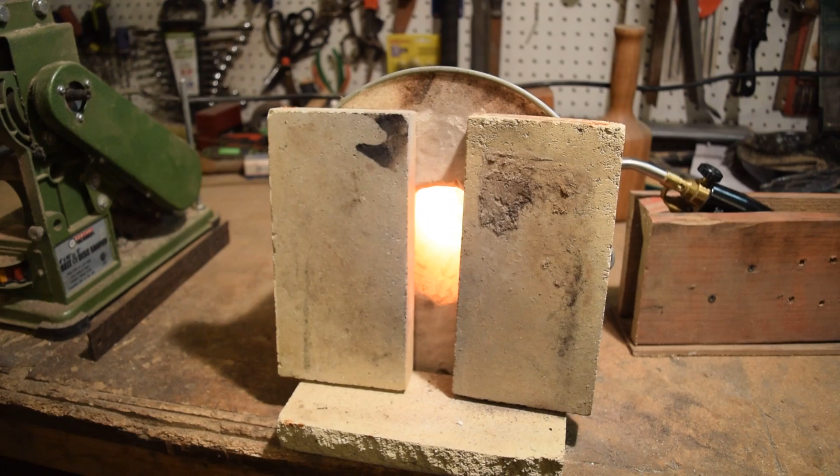My name is Dustin, and today in the shop we're going to be building a double burner forge. So I've been using my same bucket forge, which you've seen in other videos, for several years now. It's worked really well and it works great for doing heat treating for knives, anything from small knives up to medium-sized knives. But anything bigger than that, and any steel bigger than that's really hard and doesn't really work great

in the forge. So I've been really getting into blacksmithing and kind of want to make bigger things and bigger projects. I want to be able to use and move bigger pieces of steel. So I'm going to be building myself a forge, which will actually hold all that steel and be able to burn and heat up well enough to be able to do all that.

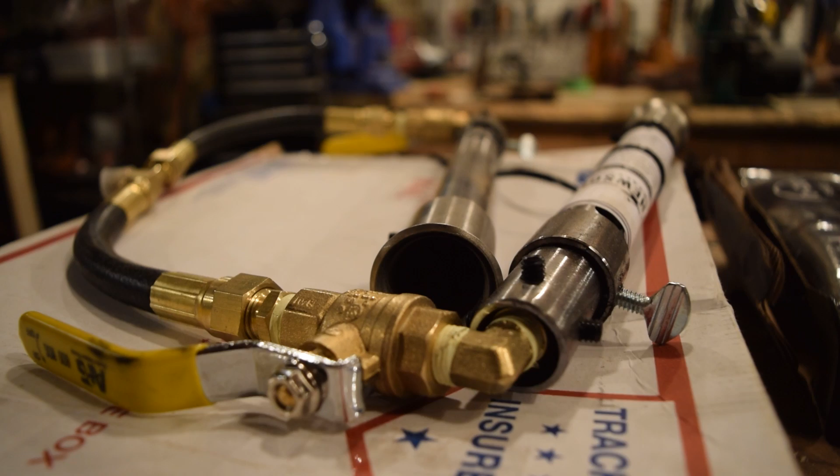And this is going to be kind of a forge that's built out of all sorts of different things. I have some steel that I had from an old lawn roller. I have bricks, refractory bricks that were given to me from a friend of mine. I did purchase the burners. It's going to be a double burner forge, so I purchased the burners from Mathewson Metals. And the rest of these things I've just picked up from a normal hardware store. So not super expensive, just something that I'm going to put together, but should work really well as a double

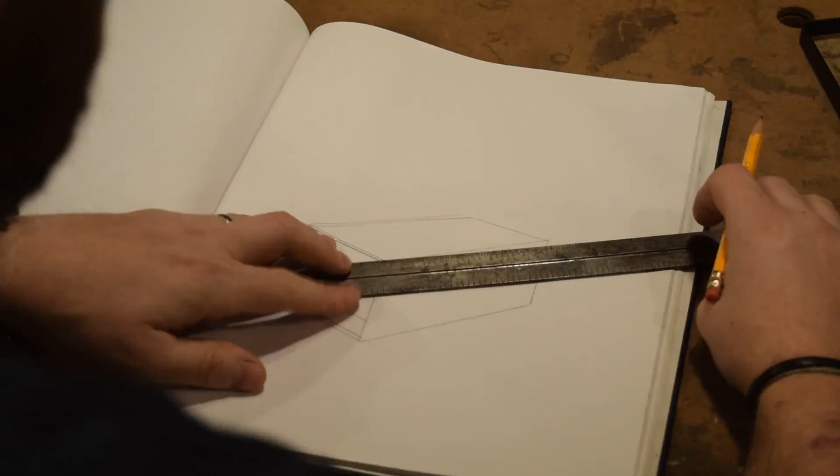burner forge. First thing we're going to do today is start on the design. So I'm going to kind of show you what I'm thinking. I'll draw it in the sketchbook so we can all see together, and then we'll start building it. My plan is to use a total of 12 bricks. So I'll have 4 bricks on the bottom, 4 bricks on the top, and then 2 bricks per side. And then the burners will come down through where the bricks intersect. I'll have gaps here for the burners to come down through to be able to burn inside.

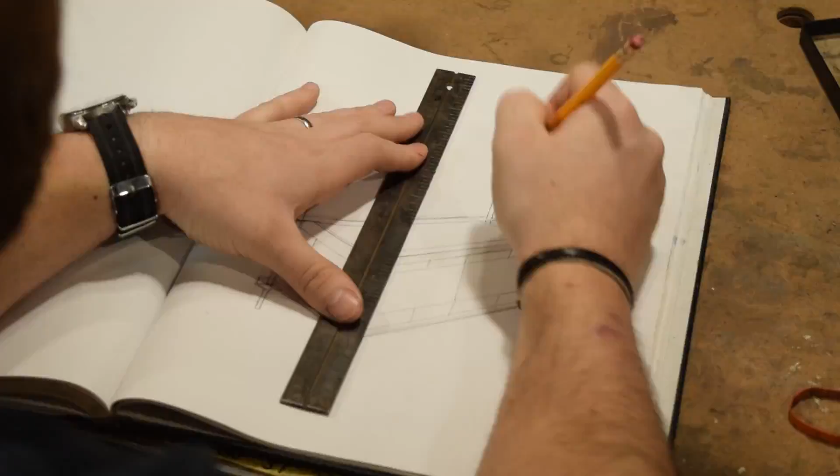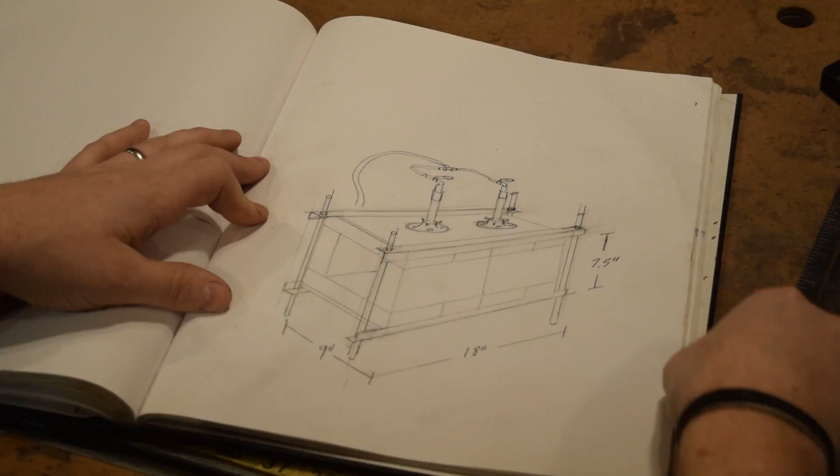And as you can see, the whole thing is held together. I'll have angle iron on all 4 corners. The top and bottom will be made out of sheets of steel, which I'll then screw these flanges into, and those will hold the burners. And then everything's going to be held together just by tension by threaded rod, which will be bolted and drilled through all of the angle iron. So in total it'll be 18 inches deep, 9 inches wide across, and then 7.5 inches tall.

What I'm going to use to do the sheet steel for the top and bottom is this, which came from an old lawn roller. I cut it apart with the intention to use it for different projects, and this will work perfectly. So this is about 1/16 of an inch thick, and it's 21 inches long, so it's going to work really well because I need to have 18 inches for the whole forge. So this is going to give me some more room on both ends to be able to drill through and be able to mount everything with a threaded rod.

So I'm going to cut 2 pieces out of this. Both will be 21 inches by 9 1/8 inches wide, which is the length of my bricks. So I'll cut out both sheets from this, and then I'll flatten them on the anvil.

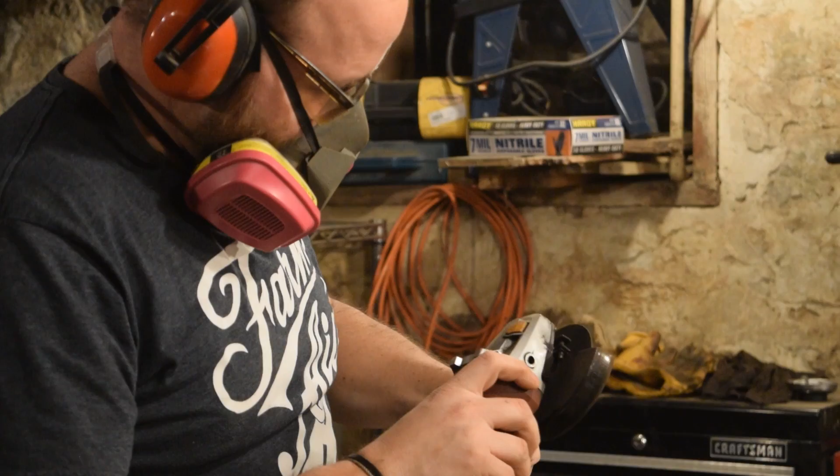Spending a little bit of time getting all this stuff set up and everything organized in the way that I'm going to have this eventually all attached together. So I have my plate steel on the bottom, the corner steel on the sides, and then 4 bricks. This will be the base of my forge. I'll have bricks on the sides and the same setup on top.

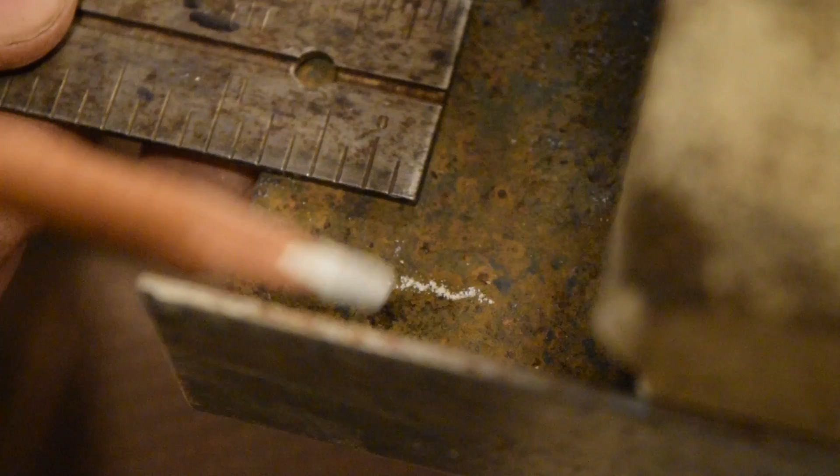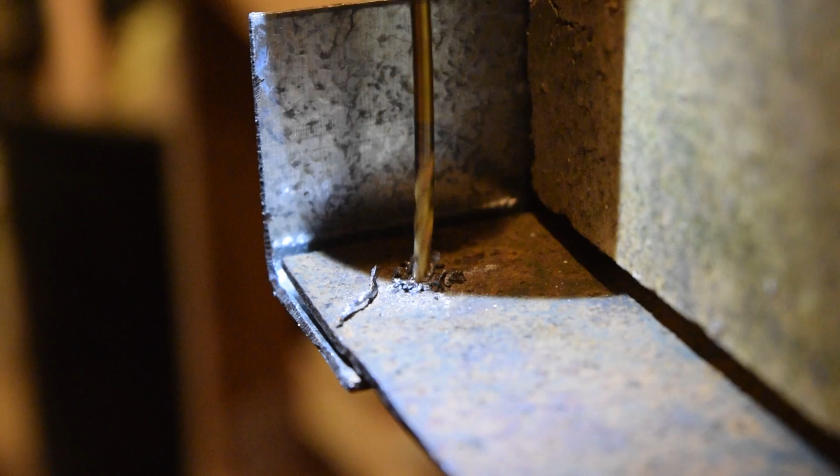But I want to make sure everything's aligned right and it's all evenly in the center, so that way I can drill pilot holes through the plate steel and through the corner pieces of steel to hold everything together. So I'm just getting it all set up, making sure it's all measured, nice and even, everything's as straight and even as possible, and then I'll drill those pilot holes.

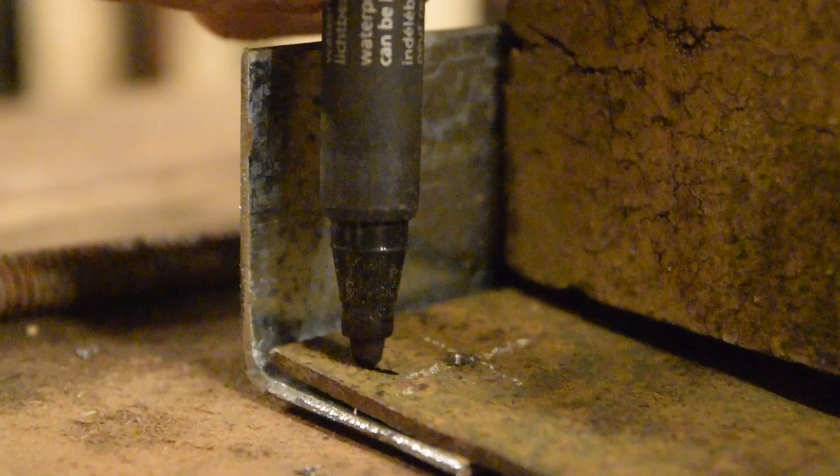And now what I want to do before I take everything apart and actually drill them all at the drill press is I want to mark all of it, everything. So I'm going to mark each brick on the bottom, 1 through 4 here, 5 through 8 on here, and then each hole in each corner I'm going to mark as well, 1 through 8, starting on the bottom to the top. That way, once I take everything apart, drill it all, put it all back together, they'll all line up exactly where I have it here and now, so I know it'll fit really well.

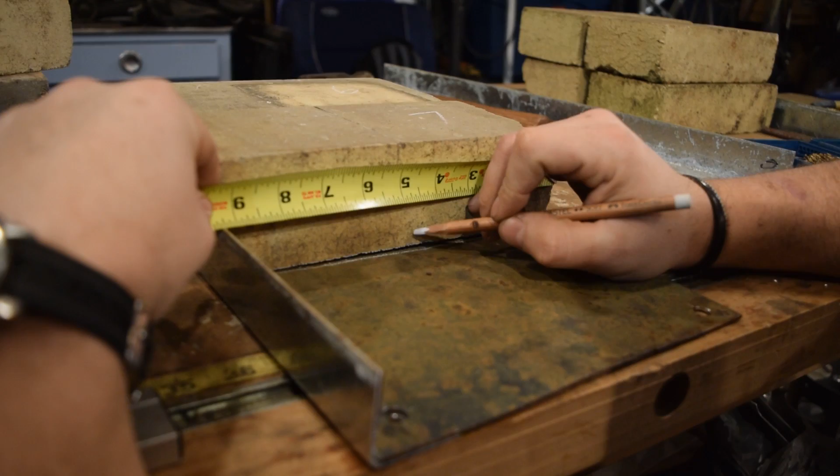So I'm going to have 2 holes coming down through the intersection of these 2 bricks where my 2 forge burners are going to come through. So I need to mark off where these bricks end so then I can cut holes in the top plate so the forge burners will come through and go through these bricks.

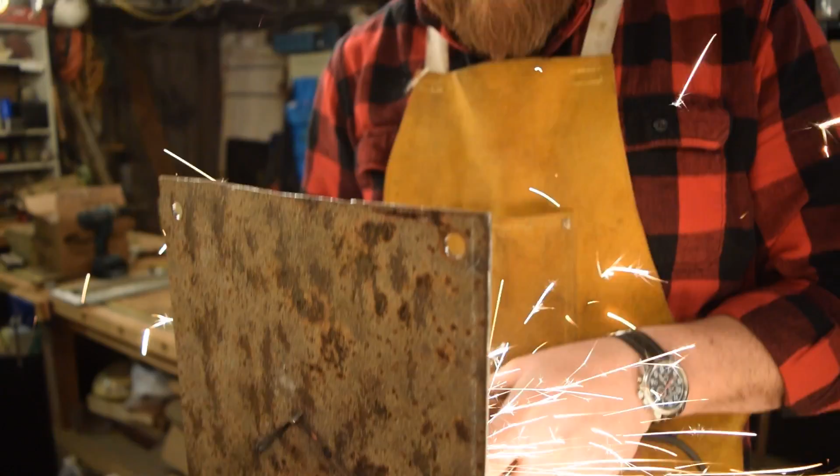There we go. Once again, because these holes are just there to accept the burners through, I'm not worried about them being cut perfectly or circles that are going to fit exactly. They're going to be covered up by the flange and the brick on the other side. So I'm just going to use the angle grinder and just cut straight lines.

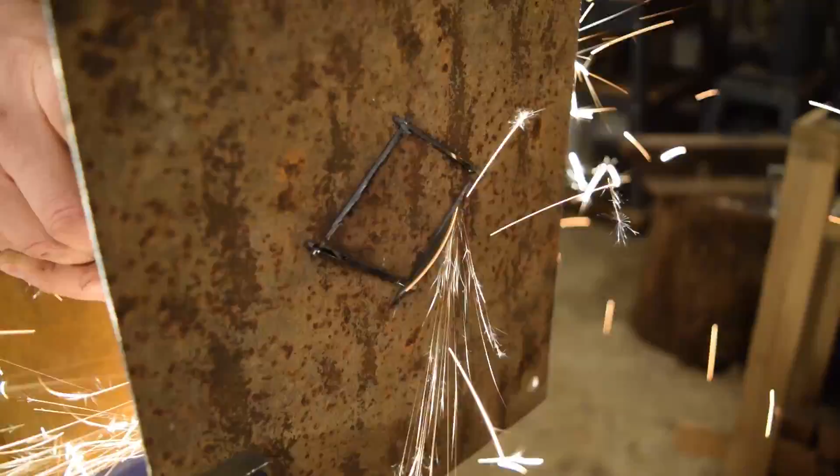So I'll make that mark and then I'll just use my square. Draw a square line coming out to reference off of. And then I'll do that to the second brick as well.

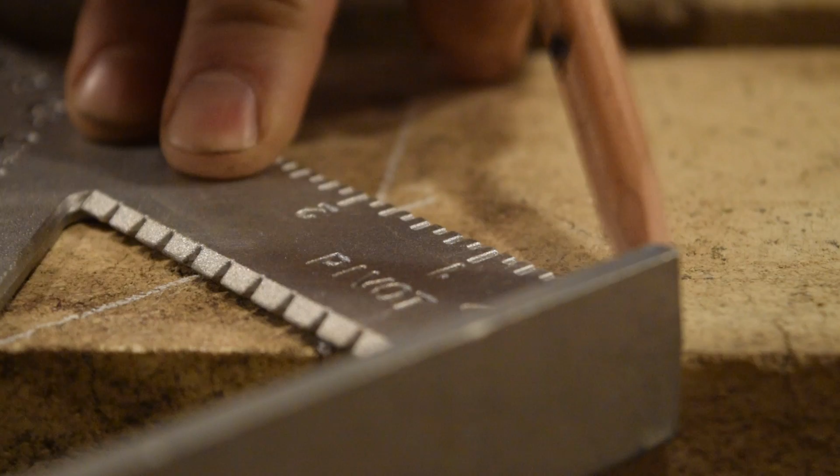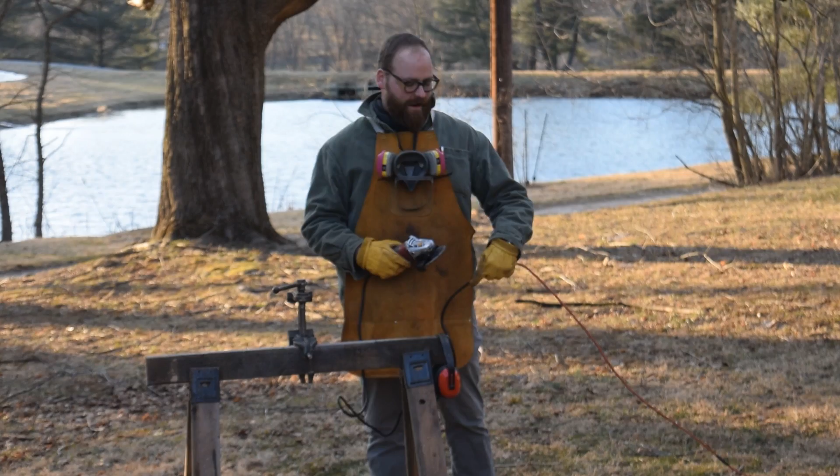So I brought my grinder outside and I'm gonna go ahead and start cutting these bricks. Now, anytime you cut bricks, it's gonna throw a lot of dust everywhere. So if you can get outside and set it up, do that. I have a movable vise that I used here and I have these that I'm gonna cut.

I'm also gonna cut the back brick. So I have a longer brick that's narrow that I'm gonna cut to be the back door of the entire forge. So when I don't need to burn, and actually heat steel all the way through the forge, I can kind of put that in and contain some of the heat inside the forge.

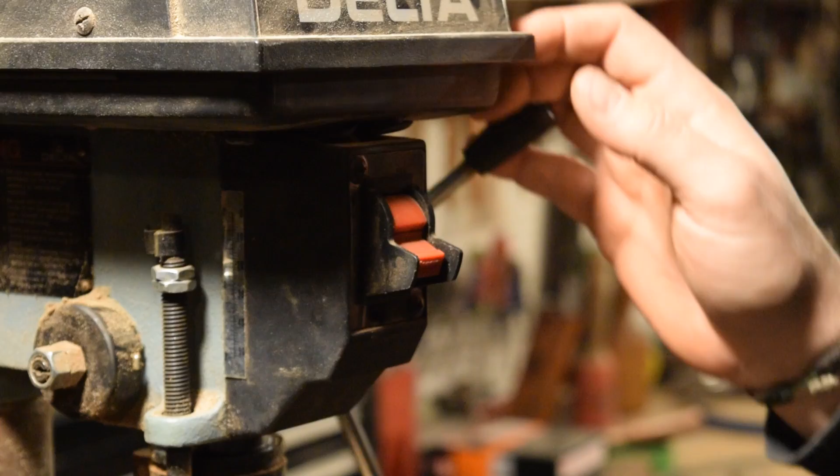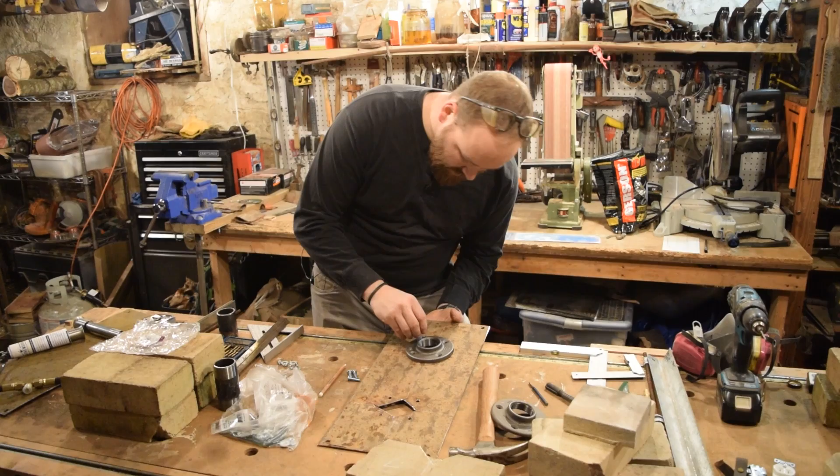Looks like all of my holes are lining up well. So I'm gonna go ahead and mount these now. Make sure everything fits right.

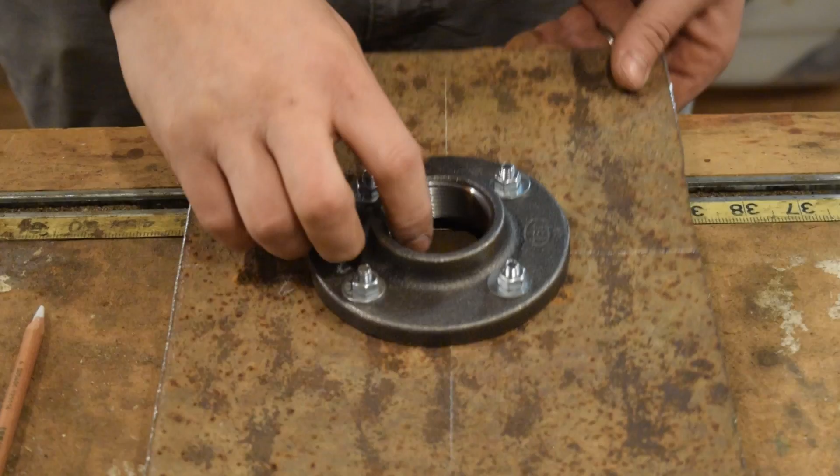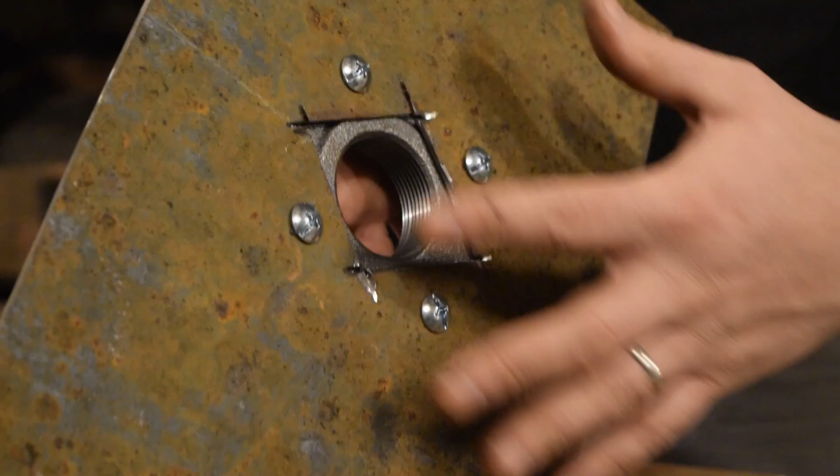Here you can see that I've used these kind of just rounded heads. They don't sit out too proud of this surface, and it won't really matter, but this is what's going to be in contact with the bricks on the bottom side. So I just tried to get something that wasn't too proud here. So they're just kind of rounded over heads.

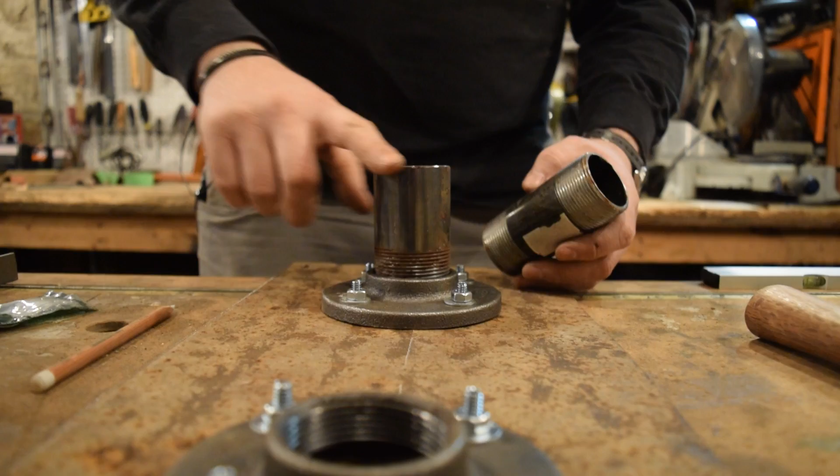So I'm using these threaded pipe nipples to attach the burners here. And this one I've already cut off. So I just need to cut the threads off of this side of this one, and then we'll attach it to the second flange. Perfect. All right.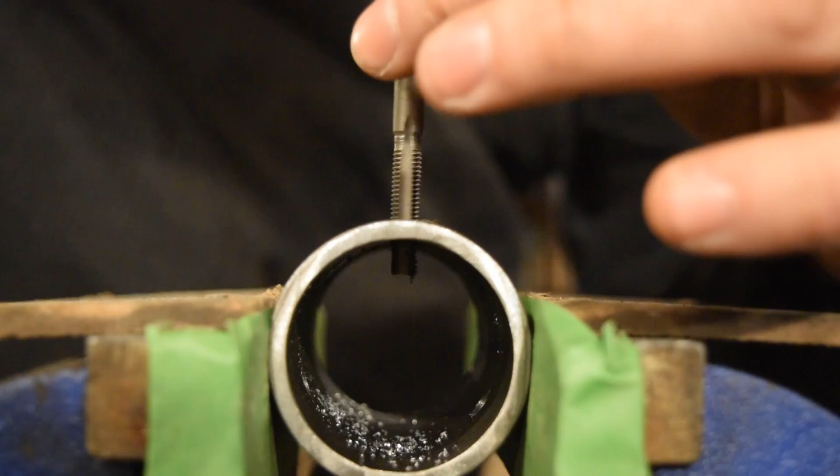Anytime you're using a tap and you're tapping out a hole, you just want to kind of get it started. Once you feel it bite and get started, then go through a little bit, maybe a turn and a half, and then you want to back out. So what you're doing is you're clearing out any of that steel that's been cut from the threads.

You go back in, start biting. You want to turn maybe a turn and a half, and then back out a little bit. You don't have to back out all the way, you just want to back out enough that you can clear out that cut metal from your cutting threads.

We'll just go a turn and a half, back out, keep going. And then eventually you'll feel it cut through. So now I've cut all the way through, and I'm just going to continue turning it maybe 5 or 6 turns to make sure I have it cut clean and clear all the way through. Back it out, and we're good to go. And that is the last one of our 6 holes.

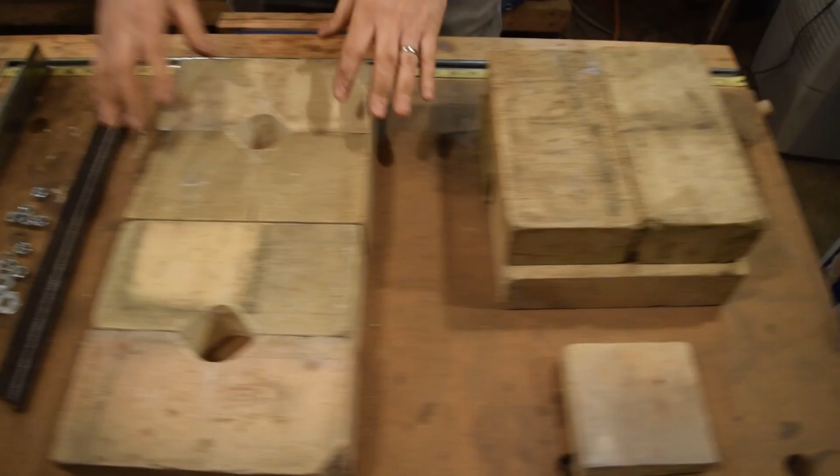Now let me show you everything I have here and what we're going to put together. So these are the 4 wall bricks and the back door of the forge. These are the 4 top bricks with the holes cut out that will accept the burners. We have the threaded rod and the hardware, which will hold everything together. We have the corner steel and the top metal plate with the flanges attached that will take the burners in here. We have the 2 pipe nipples with the hardware that'll hold the burners in place.

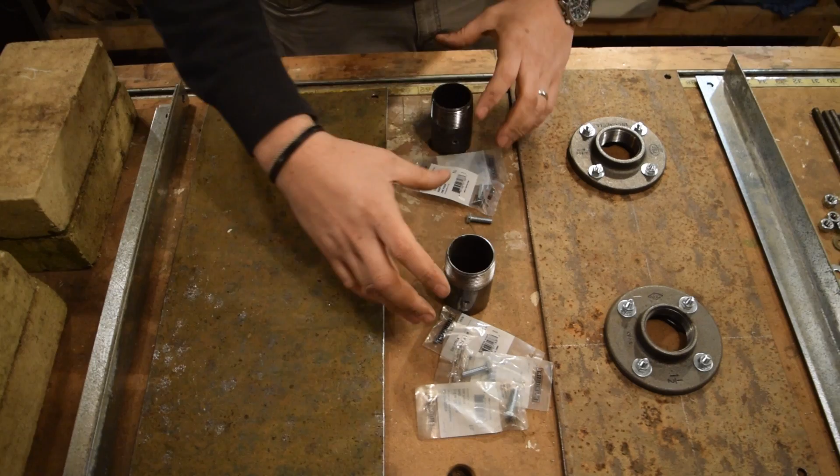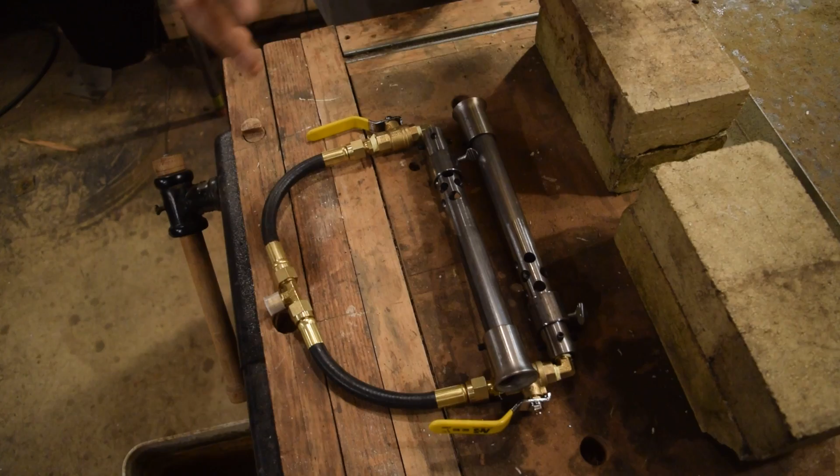I have each foot set at 4 inches. These threaded rods are 15 inches and the whole forge is going to be 9.5 inches tall, so that leaves me with enough at the top to bolt it together. This way the whole forge will be sitting off of whatever surface it's sitting on, so if there is some heat coming down below, we'll have some room below it.

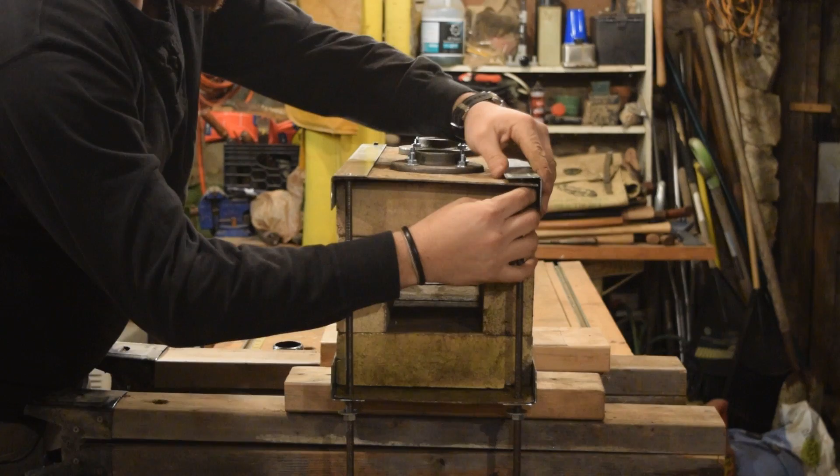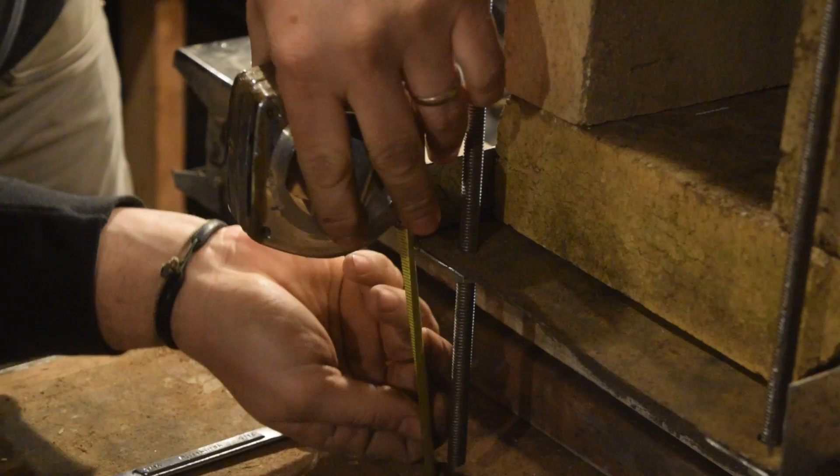I'm just fine-tuning the height of my legs to make sure they're all the same height. And the height that I want is 4 inches from the bottom of the threaded rod up to the nut. So that is.

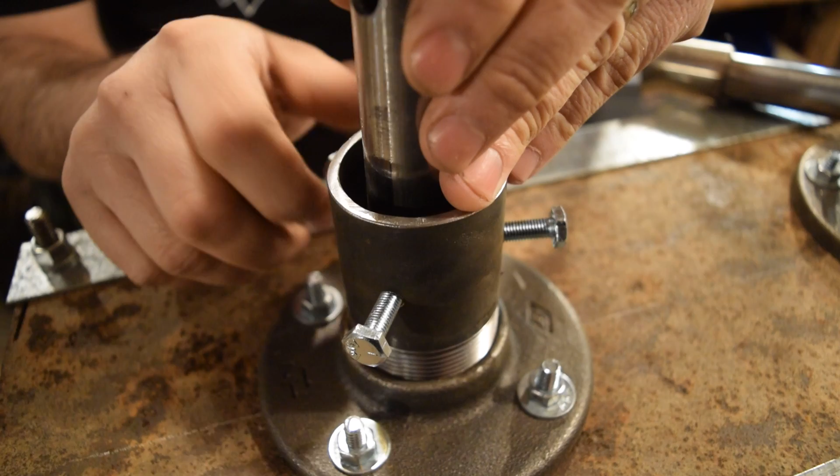So I'm setting these in to just about, I don't know, maybe 1/4 of an inch above the inside of the stone on the inside. So that way the flare at the end is actually sitting up inside the stone about, just about maybe 1/4 inch or so.

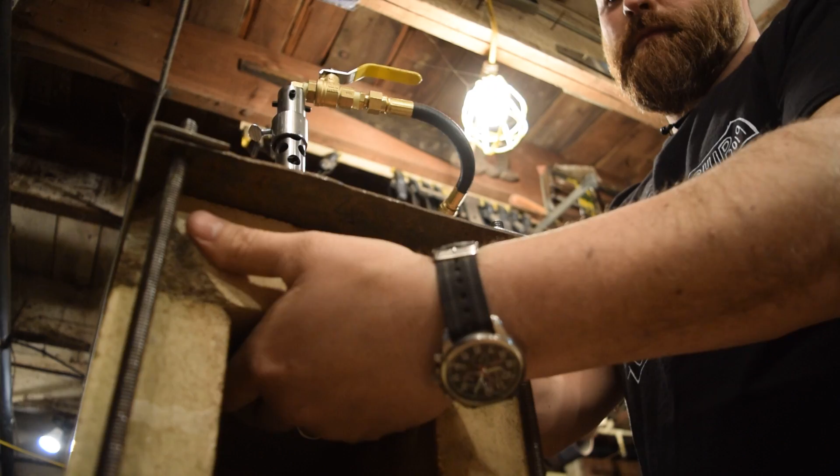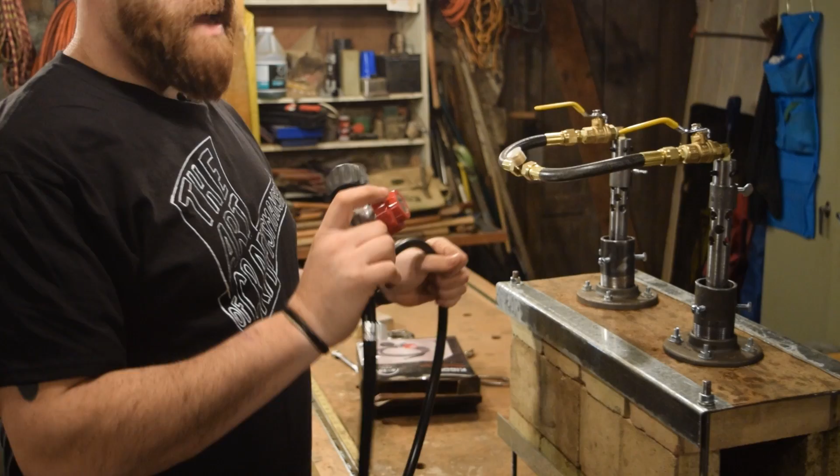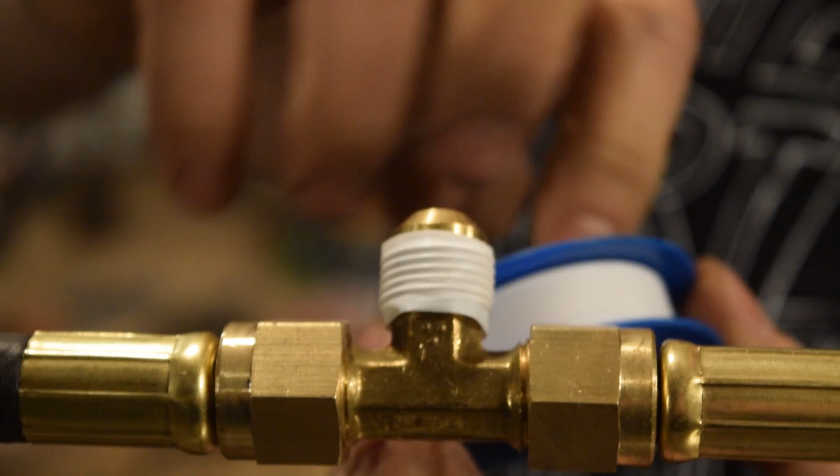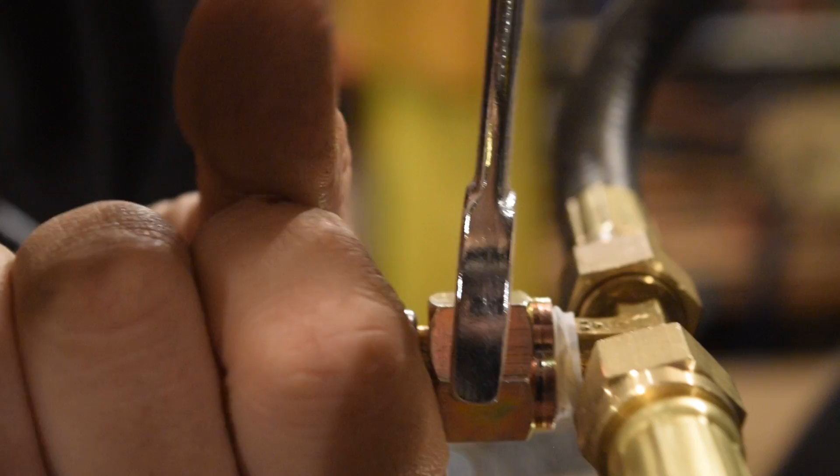All right, the last part of the process is actually hooking it to the propane tank. So what I have here is just a standard 20 PSI regulator, and this is the way I can control the pressure coming from my propane tank into the burner. So you definitely want a regulator to be able to control your pressure. So I'll attach this end to the propane tank, and then I'll use Teflon tape and attach it here to the burners. And then we'll start it up and see how she runs. Right.

All right, guys, well, thank you so much for watching. This turned out really great. I'm super happy with the way it all came together. Everything was exactly how I kind of wanted it to go, and you can see it's still steaming. There are things burning off. These bricks have been inside and outside, and so they're moist, and they kind of have some stuff growing on them. So I'll have to burn that for a while to get everything cleaned up and burned off.

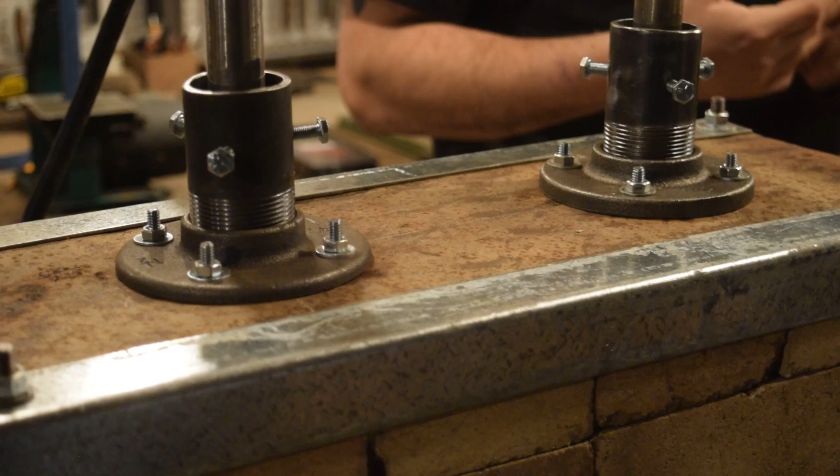And also, the burners are burning okay. This one's burning really well. This one's a little bit funky, so I'm just going to make some fine tuning, maybe some of the airflow or about how far they're down inside the forge. So I'm going to tweak those a little bit to make sure everything's running really well for our upcoming videos. We'll be doing some blacksmithing videos and some knife making videos, which will both be utilizing this forge. So stay tuned for that.